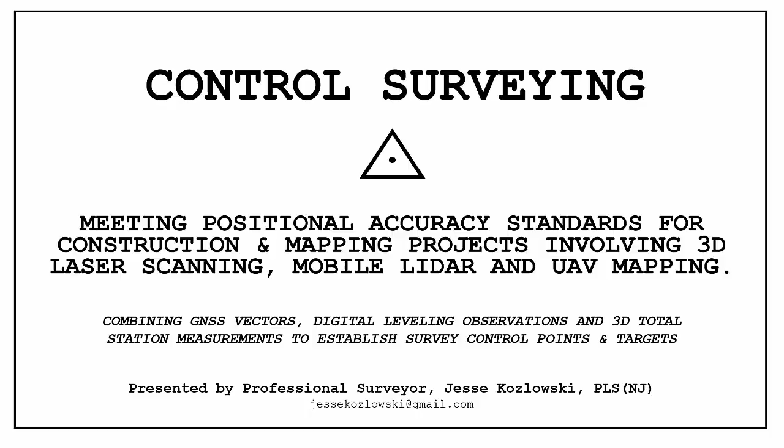This is just a preview of the presentation. I'll go into greater detail later in the presentation as to what all this is, and this is the one that I hope really captures your interest right now, to stick with me.

Mistaking precision for accuracy will hurt you, and that is going to be the primary topic covered here.

A little bit about me. Again, my name is Jesse Kozlowski. I've been surveying for about 40 years now. Here's just a little bit about my bio, and most of my career has been spent doing control work for all sorts of projects, large and small, and so that's kind of my specialty, and that's what I'll be talking about in this presentation.

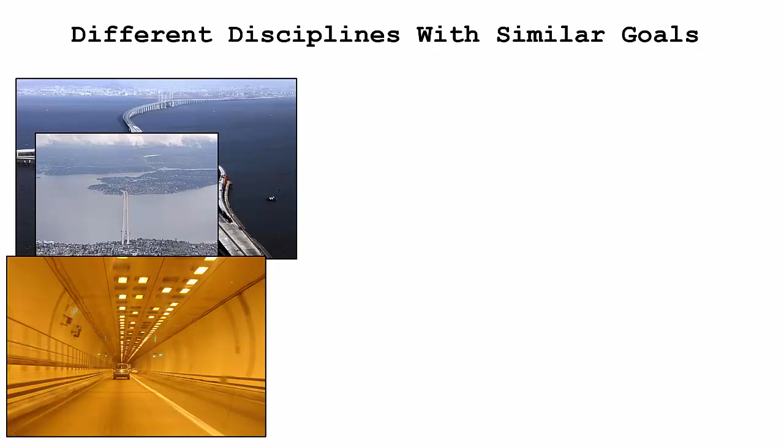So what I'll cover today is really applicable to lots of disciplines, whether it's highway involving bridges and tunnels, or railway transportation, again lots of tunnels and bridges, energy transmission and generation in power plants and utility lines, and pipelines for gas and oil, and of course building infrastructure. Everybody involved in these various disciplines all relies on survey control to get their projects completed.

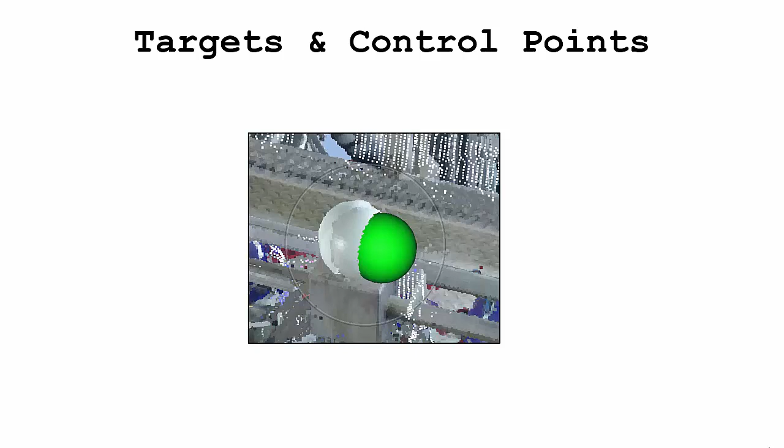All right, let's take a quick look at targets and control points. They're going to be different depending upon the application. You may have seen these types of spherical targets on your projects for 3D laser scanning, or for mapping projects you may have seen these black and white checker patterns with a number, sometimes painted in the roadways for aerial photography or UAV mapping. And then this type of chevron target is used in mobile mapping applications quite a bit. It could even be something as simple as a checkerboard pattern printed on paper, taped up on the wall.

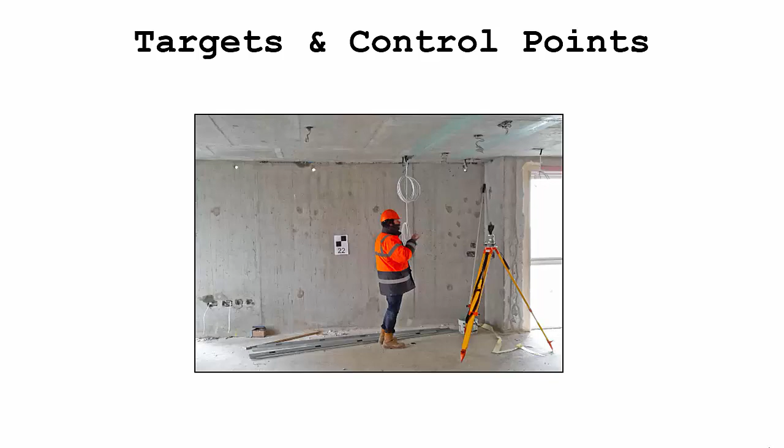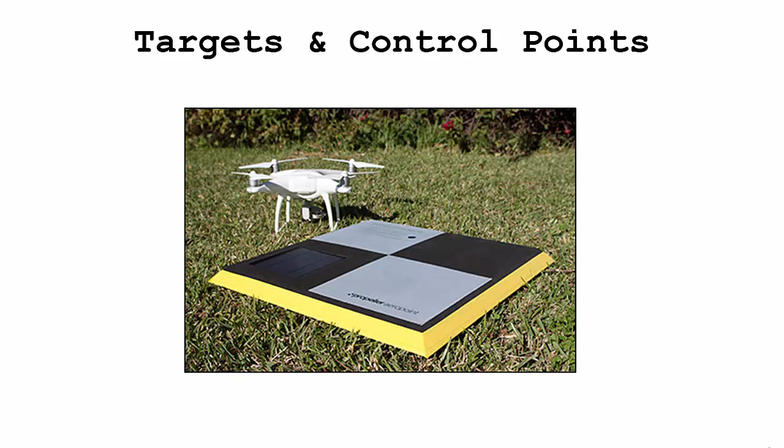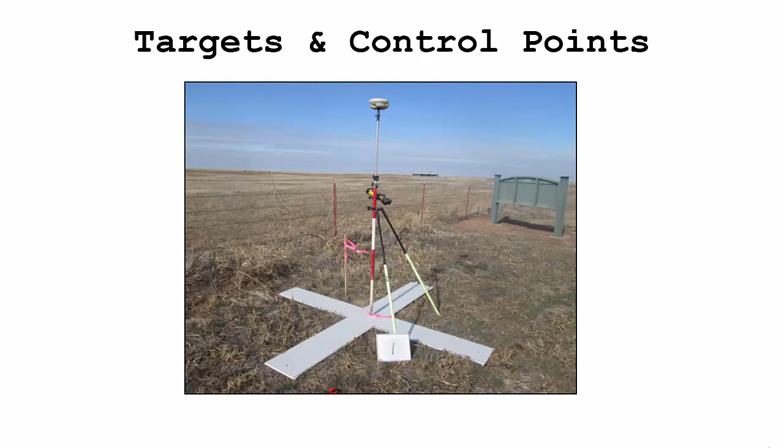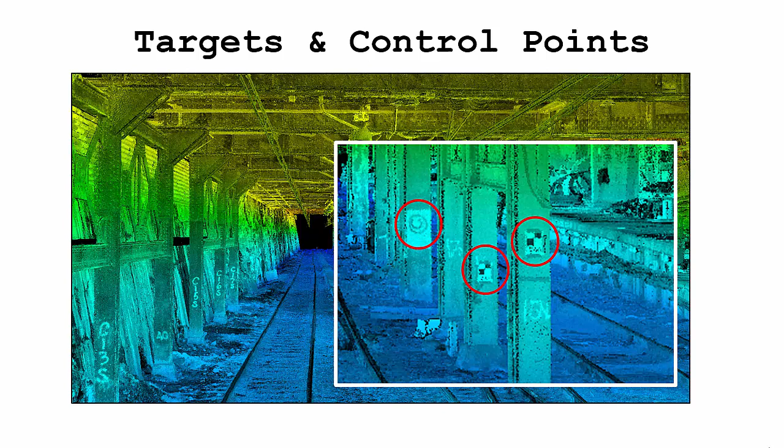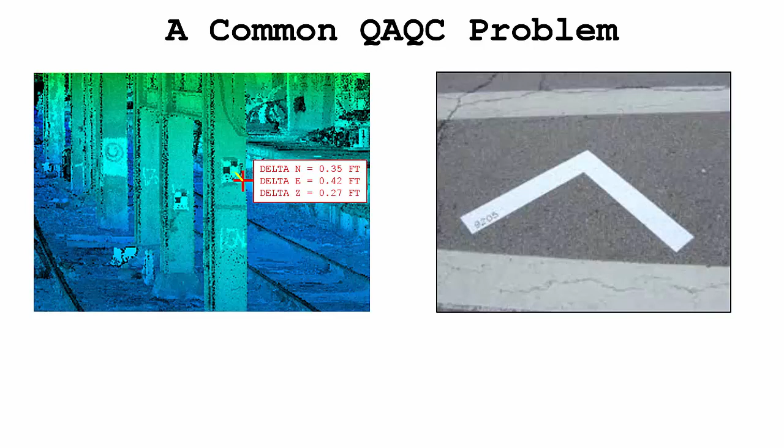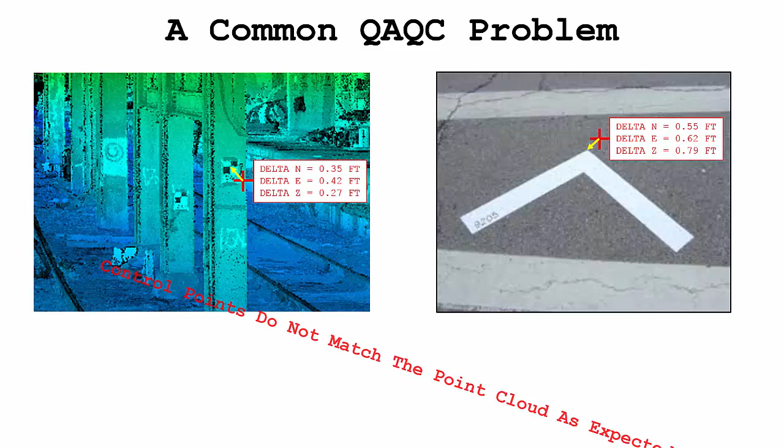Okay, in the next slide I'm going to introduce a common QAQC problem. Let's take a look. We have some point cloud data here, and we're comparing our coordinates for that target, and we see deltas, that is differences. Over here on the chevron we have some mapping digital photography, the coordinate of the chevron is different than the control value. And the amounts of these differences are larger than expected, or possibly just entirely unacceptable. So in a nutshell, what we're saying is that the control points do not match the point cloud as expected. So what is the expectation?

Well, it has to be as accurate as possible. You may have heard people talk like this: it has to be perfect, and there's no room for error. Or they'll say it has to be within an eighth inch. The contract specifies sixteenth inch tolerances, or thirty-second inch accuracy, or it has to be second order. Alright, so here we have various expectations.

Let's talk about these a little bit. In my mind, these are just imaginary, because there's actually no such thing as perfect values, and I hope to get that across through this presentation. These other ones, while they are at least better than the first three, there is still the need to verify that you've obtained these specifications. And when you haven't, the situation becomes one where people are pointing fingers at each other. How do you go about verifying that you've met these specifications? So I'm saying that these are all ambiguous, and that this is where the problem actually starts. And as far as second order, who even knows what that means anymore? So I want to take a look at that.

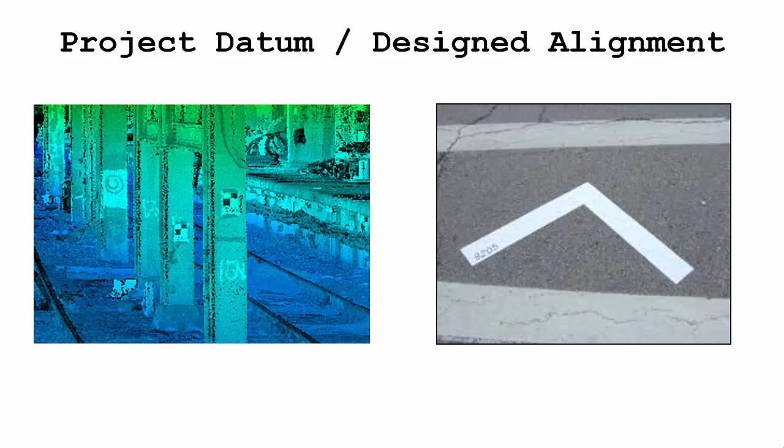You're probably already aware that technology is advancing to the point where each setup of the scanner is being registered in real time in the field. So your point clouds are registering together, but that's different than registering those clouds to the datum. That's something else, and that's what we're talking about in this presentation. We're talking about the project datum and the designed alignment, so that the cloud and imagery matches the control points on that project.

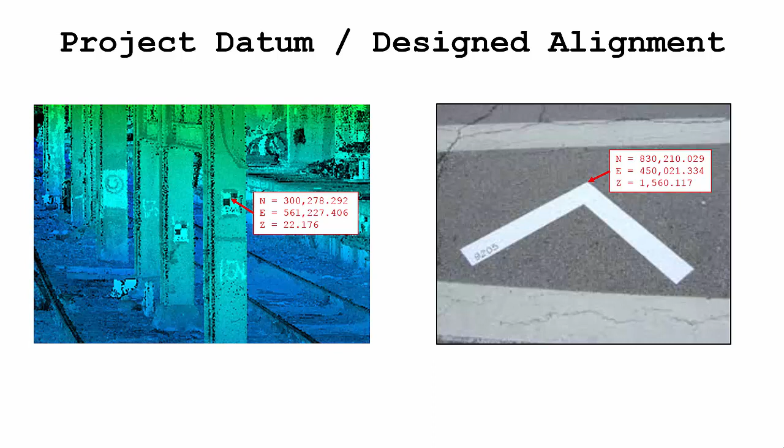So with that distinction made between registering point clouds together and aligning those clouds to the project datum, let's get back to the QAQC problem I'm presenting here, where again the control points and point cloud do not match. We're going to continue with this idea.

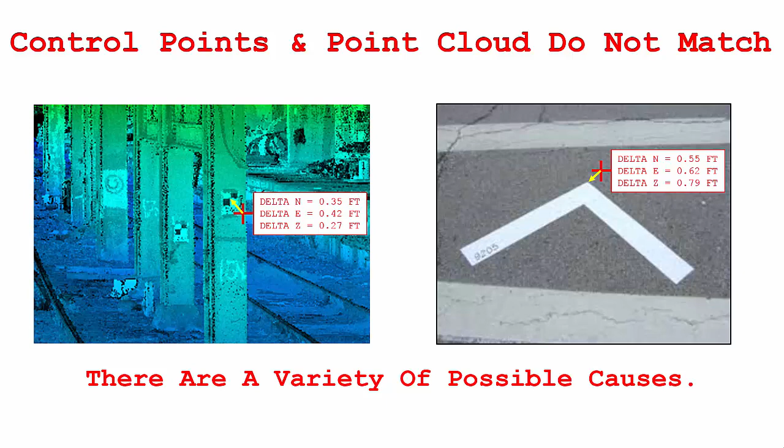There are a variety of possible causes to this. You could probably start thinking of some in your own experience, but no matter what the cause is, things come to a screeching halt. Like I said, there's finger pointing. This has to be resolved before you can continue.

There's an easy solution to the most common cause, and that's what I'm going to focus on through the rest of the presentation. By the way, what I'm going to show you has to happen no matter what anyway. You have to begin with it before you can even start to explore any other causes. Most often, what I'm going to show you eliminates the problem immediately. I'm just trying to keep your interest—stick with me, I can't tell you the whole thing in the first two slides. So here we go.

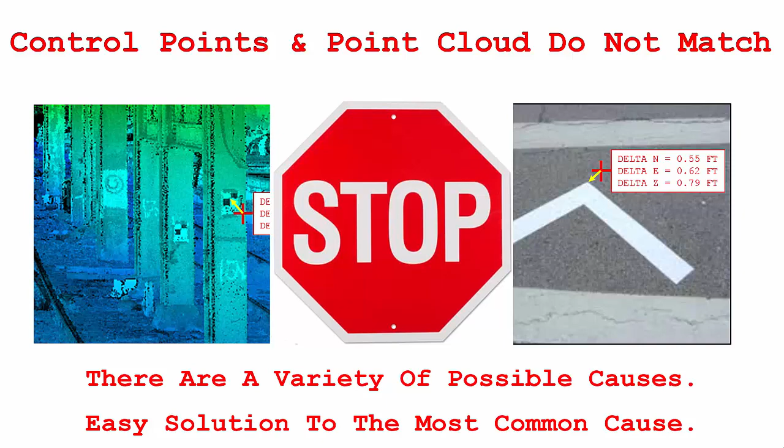Back to this examination of the expectations—I told you we're going to look at second order, and this will give us a history of where things were in the past and how we get to where we are today. Even though technology is changing rapidly, a lot of things remain the same. The common basics still apply, so let's keep that in mind.

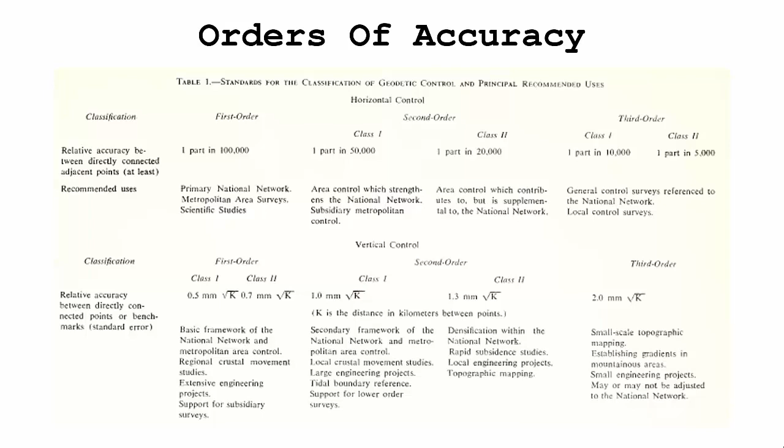Back to our very brief history lesson, taking a look at what second order is and where that came from—I'm saying it's old school. You can look at this document from 1974, and as you look in here you'll see orders of accuracy: first order, second order, and third order, and the classes below those. Lots of people think of just closure only—oh, they've met first order because they closed in greater than 1 part in 100,000.

There's more to it than that—it's actually a prescriptive standard, not just the closure that you meet. It's specifying the types of equipment to be used, the number of repetitions to be observed. So it tells you how to do the work in order to meet that order of accuracy.

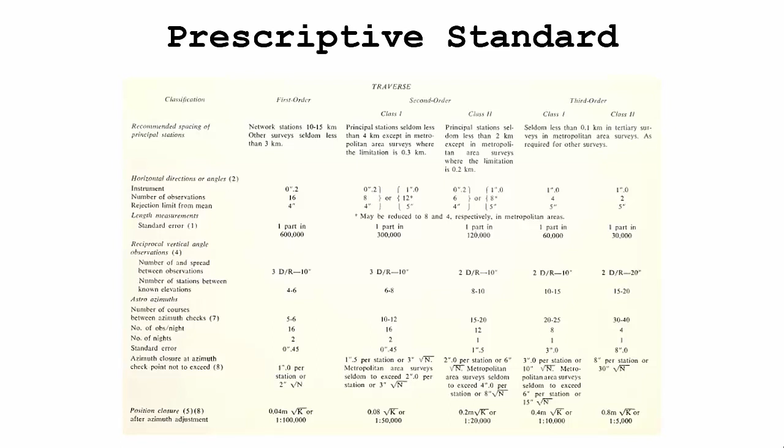All right, with that little bit of history out of the way, we're going to jump into the bulk of this presentation involving positional accuracy standards—not closure, relative closure standards. Let's take a look. If you look at page 2-3 of this publication by the FGDC, published in 1998, it's really becoming—a lot of state DOTs are starting to incorporate this standard now too, with the recognition that we're not doing things the same way all the time anymore. This standard is actually preferable for doing control work, especially in this modern era of 3D laser scanning and so much digital imagery.

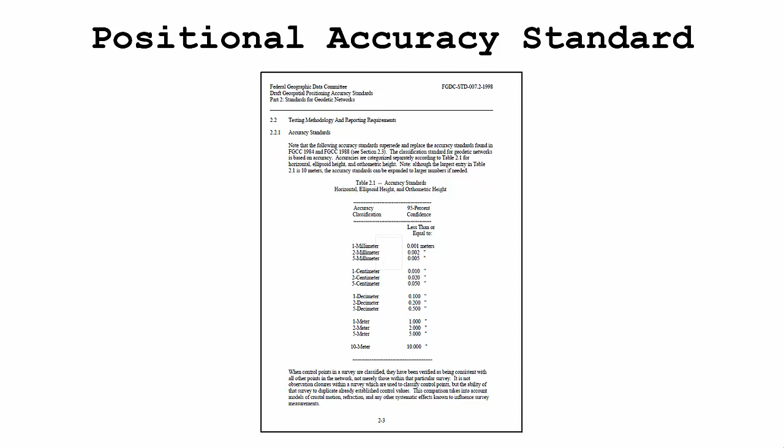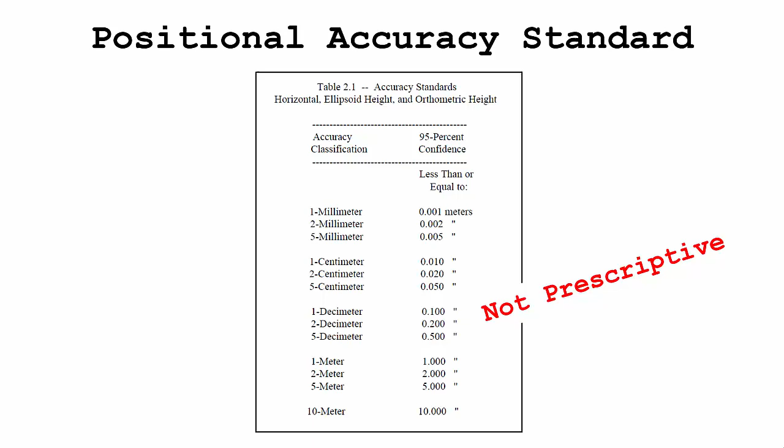Let's zoom in on that a little bit. And that's it. This is not a prescriptive standard. You won't find anything in this book telling you that you have to make your measurements this way or that way, or that you have to use this type of piece of equipment. It's not that way anymore.

About the only thing prescribed is how to handle the data, the fact that it must be analyzed, and there are certain things you have to do, which I'm not going to cover right here, but that's about the only prescription you could say is there. This is a more flexible way of doing our survey control work, and it accommodates a lot of the technology we have at our disposal now.

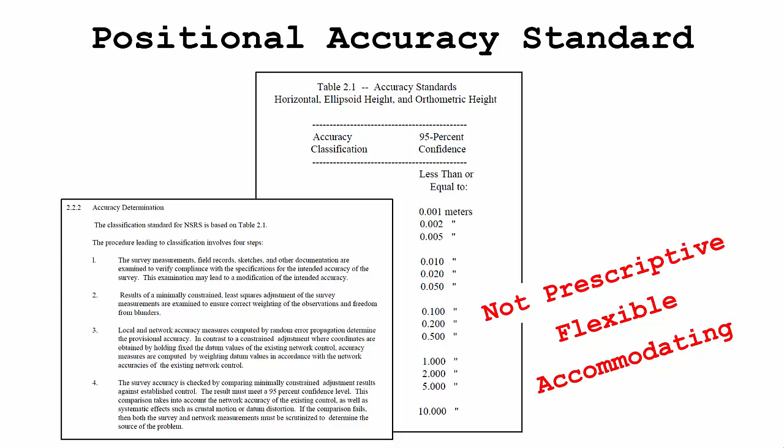So I've been seeing some discussions on LinkedIn about where we are today with trying to get people involved in surveying. Some people complain we have a lot of button pushers, which I really feel is unfair, because anybody that's involved in surveying now, that is just getting involved now, does not have the luxury or afford the time that we've had coming up through the profession as a rodman, then an instrument man, then a party chief. Those days are gone. We had a longer time to learn the profession. So it's up to us to help and mentor those who are coming in now and try to catch them up a little bit.

This is a great book, and I'd recommend it to anybody that is interested in survey control and the measurements involved in land surveying, by Ben Buckner, Surveying Measurements and Their Analysis. I'm just going to pull one thing up here from chapter 9, the surveyor as expert measurer.

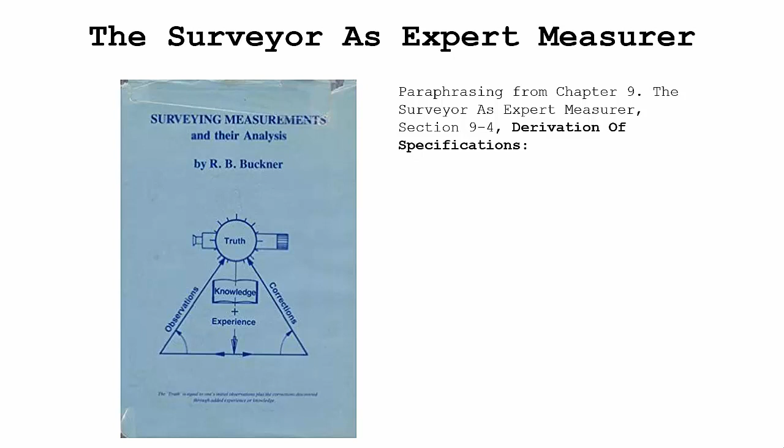He says here, many surveyors will arbitrarily select equipment and methods, then merely hope that the tolerance is achieved, blindly relying on the precision of the equipment. These surveyors will certify to the accuracy, rationalizing that they had done their best.

So the fact is, the equipment we have available today is incredible. If we can just manage to get it set up over the right point, you're going to end up with incredibly precise measurements.

All right, so we have to go beyond that, though. We have to actually handle the data and analyze the data. We have to assure that the results are where they need to be, that we've actually achieved the goal for the project. So again here, instead, the professional approach includes a thorough design of the measurement specifications to achieve the required accuracy for the project application.

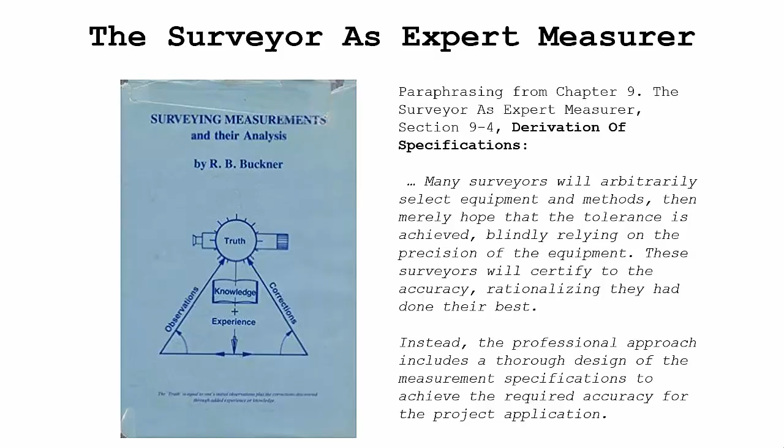So what I'm going to go into now is a presentation of some data, discussing this whole accuracy versus precision thing. You've seen this topic covered so many times, I'll just show you my take on it. I'm going to be using a real-time network VRS example, but it could easily also apply to an RTK base station and rover. So we have here a Trimble R10 set up over a point out in front of the office.

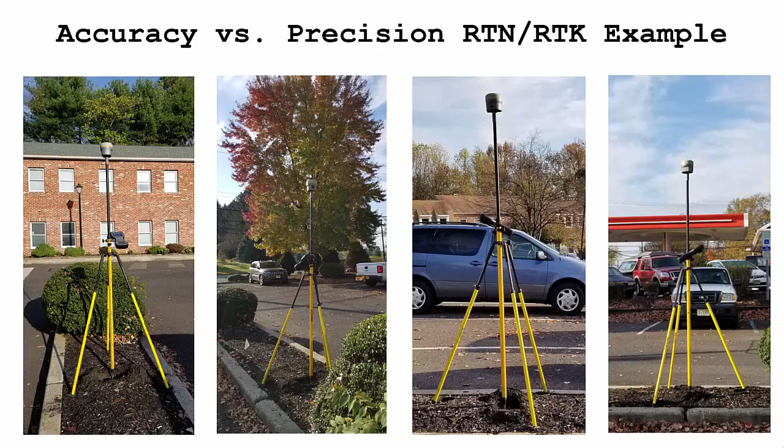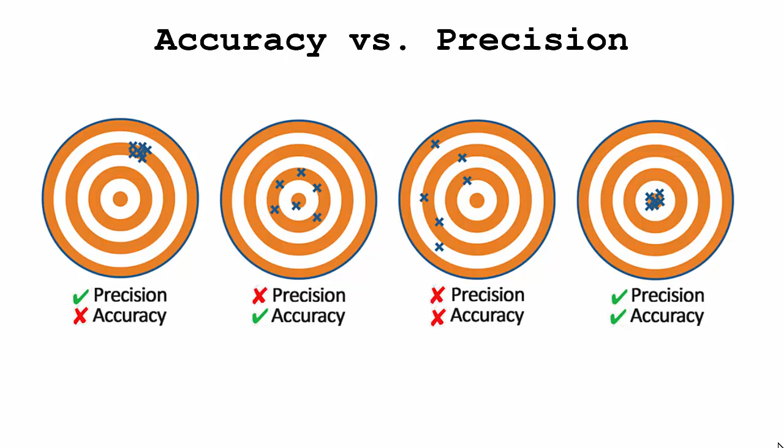We want to take that equipment, operate it properly, and use the appropriate care to assure that we end up with accurate results. The one on the far left is the example of using this incredible equipment and possibly not taking the care needed, or making blunders that should have been detected, so you have high precision measurements, but they're nowhere near achieving the accuracy needed. So boom, I'm just going to leave that there. Distinction between accuracy versus precision.

So the data that I'm going to be showing you - it's just collecting some VRS data in the morning. I got nearly 3 hours, actually 2 hours 50 minutes of data, and I had the equipment set up to log a position every 30 seconds. So we ended up with 342 observations. Then in the afternoon, I got just over 2 hours, about 2 hours and 16 minutes of data, and that ended up giving us about 250 observations, again at a 30-second epoch. All totaled, between the morning and the afternoon, we have 6 hours and 41 minutes of data.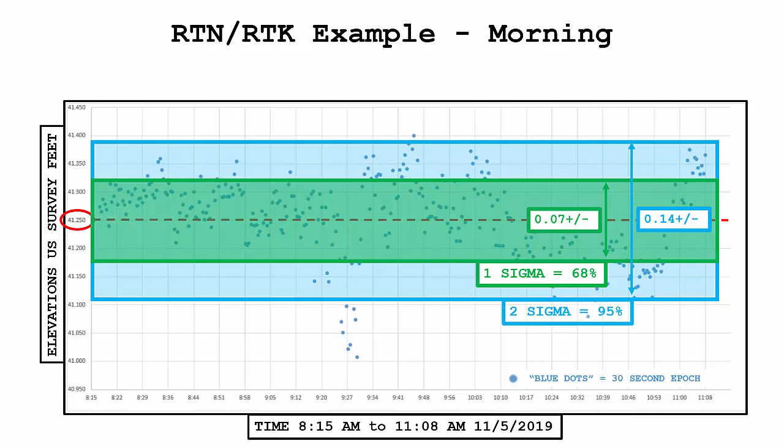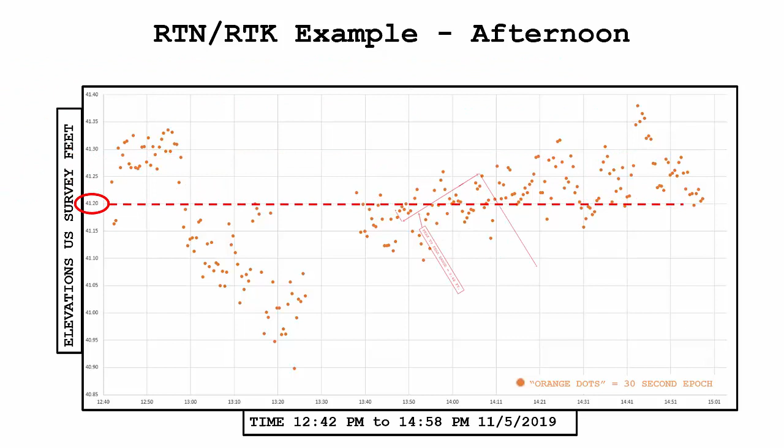Now let's look at the afternoon. There's our average, 41.20. There's our peak-to-peak range of almost 5/10 in this case. These orange dots are again 30-second epoch recordings.

And again, looking at the standard deviation, in this data set it turned out to be plus or minus 9/100ths, which is 1 sigma. And bumping that up for a higher confidence...

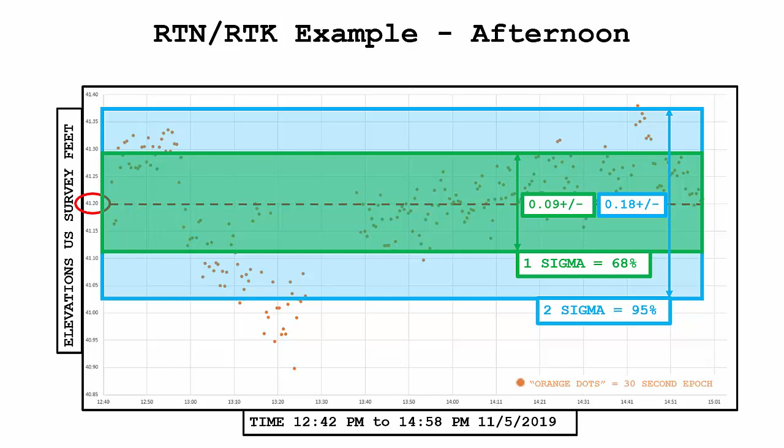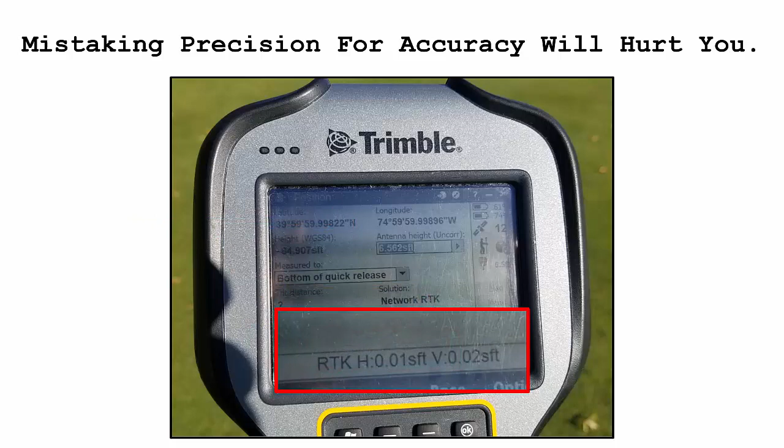So when you look at that, I hope you now get what I'm saying here, that mistaking precision for accuracy will hurt you. When you look at your data collector, let's zoom in there, and you see 100th by 200ths, horizontal and vertical.

And you think that what you're doing right there is accurate to those numbers. You're mistaken. Basically these values are the precision of the system performing at that moment. You're seeing that type of repeatability at that moment, and they're being reported to you at 1 sigma, which is 68% confidence. I'm showing you a Trimble data collector here.

This would apply to any manufacturer. They're not doing anything different. This is how RTK works.

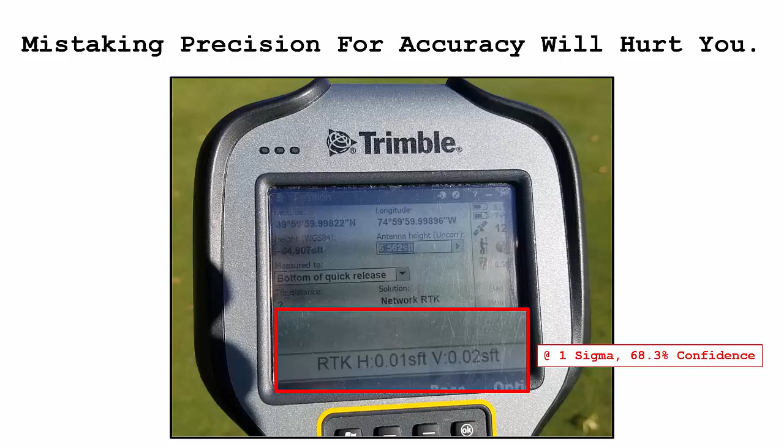Just before we move on, a reminder again of the difference between accuracy versus precision. So the data we just looked at, we were just set up on a random point. We really couldn't say anything about the accuracy. We were just able to examine the performance of the system by setting it up on a random point and then doing some statistical analysis on the data collected.

And we find that the system performs exactly as stated in the manufacturer's brochure. If you flip over the brochures of any of the manufacturers, they're going to tell you how the system performs and what its precision is, or its RMS, and they're usually reported at 1 sigma.

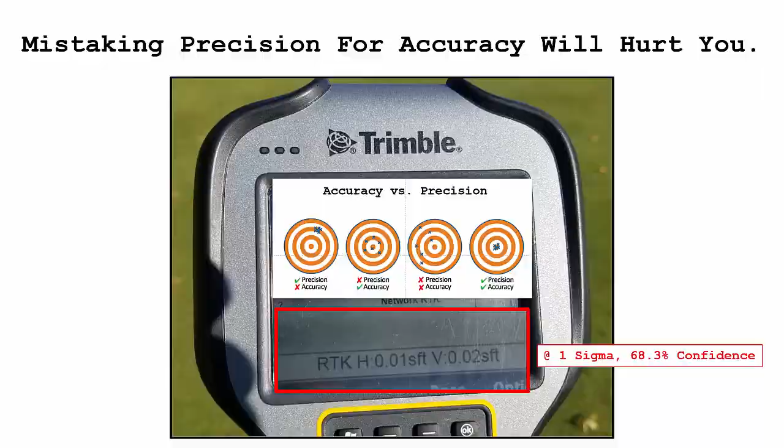Next, we're going to look at doing the same type of test and having a point to compare to. So in this case it's station HAINESPORT, which is a deep rod mark. There it is. It's a deep rod mark set to refusal, and was published in 2006.

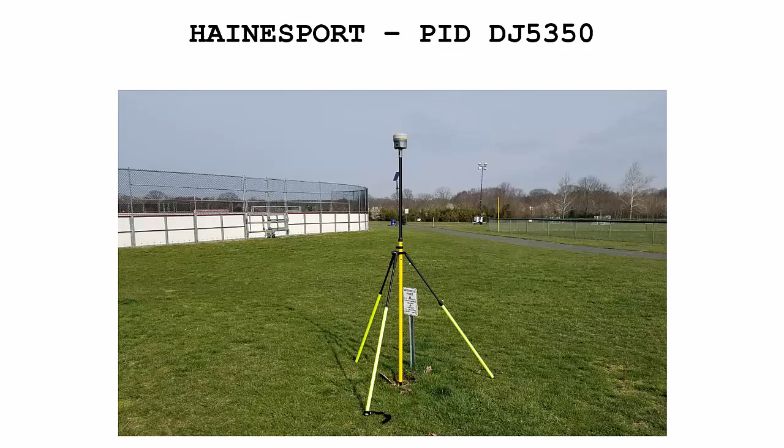And here is the Trimble R10 receiver set up over that mark. And here's the data sheet for the mark, and some field notes just indicating the date of the collection. Again, 30-second continuous topo, and also recording the raw data,

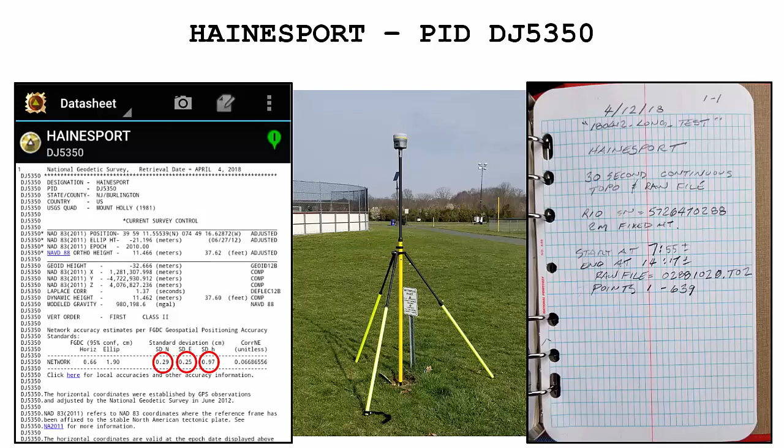and the start and stop time. So over here on the data sheet, you could see that they report the positional accuracy just the way it is described in the book, in the standard book, the FGDC book I showed you earlier.

So here's just a quick presentation of the data. This was not a morning and afternoon, it was just one long occupation, and it was about almost 5 hours and 20 minutes. So we ended up with 639 observations at a 30-second epoch, and I also sent that data to OPUS.

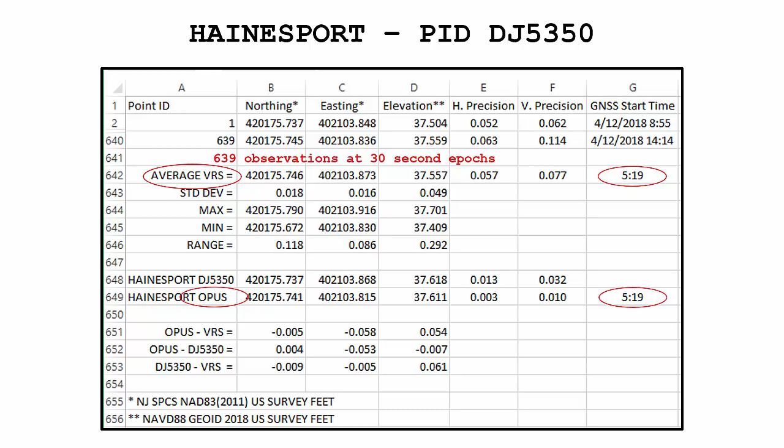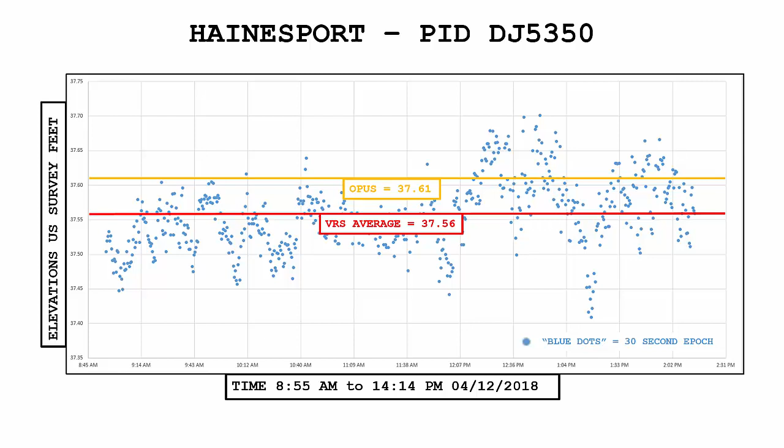The peak-to-peak range over the 5 hours and 19 minutes was almost 3/10. And again, what's the expectation? Read the data sheet, I mentioned this earlier. You can take the data sheet for any piece of equipment and look at what the manufacturer is telling you.

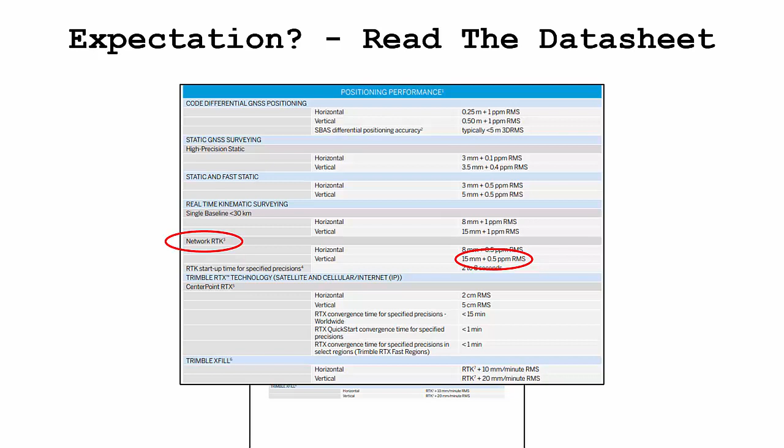You can expect in terms of performance. So in this case, this was a network RTK, and the expectation in the vertical is 15 millimeters plus 0.5 parts per million, and that's reported at an RMS, meaning that it's 68.3% of the time. Okay, so let's plot that.

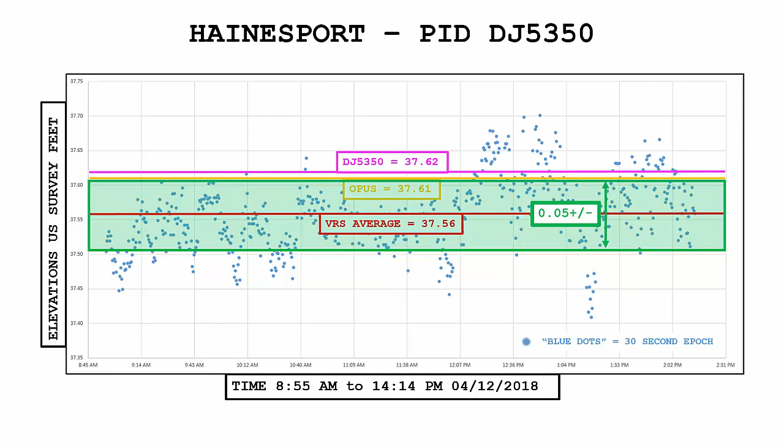Here we see the 1 sigma value is, in this case, plus or minus 5/100ths of a foot. So there's the 1 sigma, and at 2 sigma it's plus or minus 1/10 of a foot. 2 sigma.

Did we make it? If we take the 15 millimeters plus the 0.5 parts per million, we see that we should be performing at 1 sigma within about 5/100ths, and we see that we are. So the system is performing well within the tolerance specified.

Let's look at this data a little more. Here we have the peak-to-peak range in the elevations as almost 3/10 of a foot. Let's look at these 3 times — I almost said points, but these are not points. We're occupying one point called HAINESPORT. These are just 3 portions of time: A, B, and C. Keep in mind the data collector screen I showed you earlier, where you're looking at the precision, is 1/100th of a foot horizontal, 2/100ths of a foot vertical, and that's at 1 sigma.

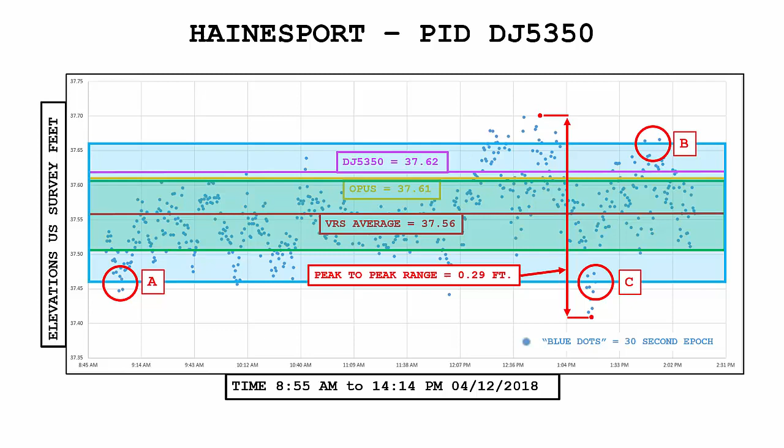Speaking of methods and procedures designed to achieve an accuracy specification, take a look at Mark Armstrong's presentation, dated 2013. Go look this up — it's an excellent resource going through this entire topic of precision versus accuracy using RTK. I'll leave that there for you to go find for yourself and take a look at. It's very valuable.

Okay, moving on. Now back to the main topic of this presentation: this common QAQC problem where the control points do not match the point cloud as expected. We're about half an hour into the presentation, I hope you've stayed this long. We're really going to get into some interesting stuff coming up. Stick with me, it'll be well worth your time.

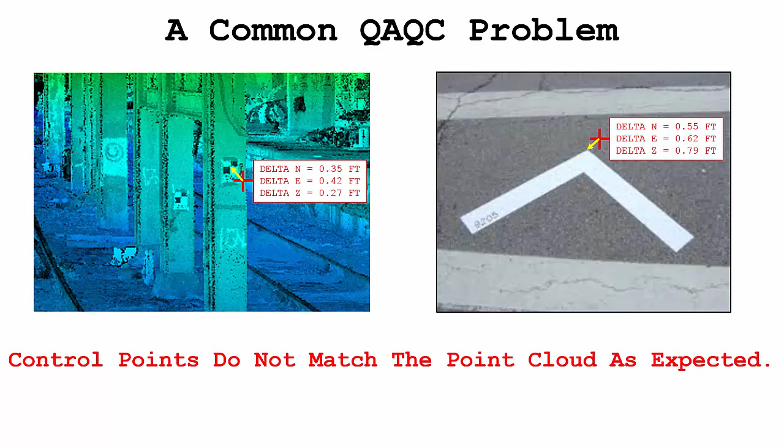Just to remind you, what we're seeing is a situation where the control values are not matching either the point clouds, the imagery, or in some cases actual construction elements on the project. So continuing, we're going to examine the problem now, first by looking at something very common: your typical text file that you'll receive or generate, a comma separated text file of ASCII information.

Insist on receiving the positional accuracy of the control points and the targets. So when you have that information as the last 3 columns, you are better equipped to make an evaluation or determination of how consistent this control is. Does it meet your expectation? Does it meet the accuracy goals for the project?

Have these points all been leveled through? Were they supposed to be leveled through? Does anything stick out that might indicate a problem? That type of evaluation can be made right away just by sorting the columns by largest value. You can see anything that might pop up.

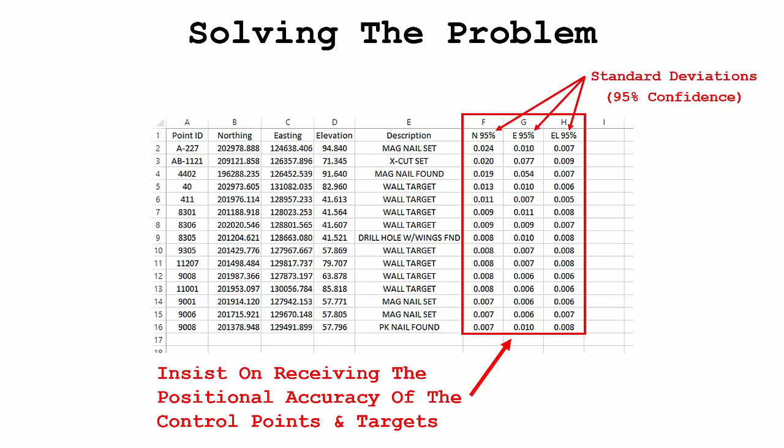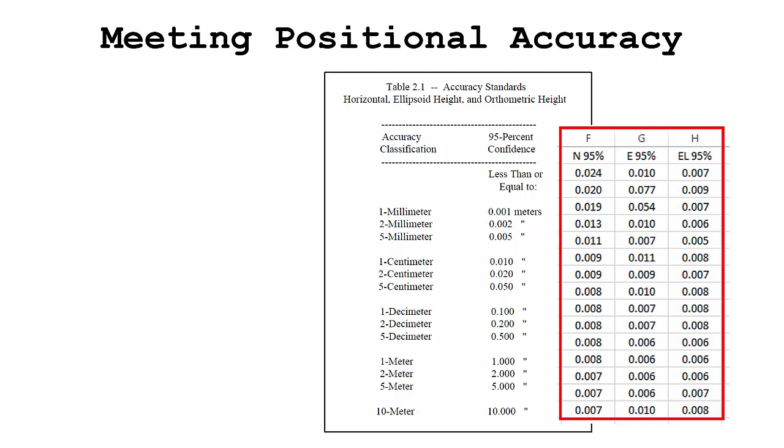Let's take a look at an example, bringing back into the discussion the book I had shown you earlier, the 1998 publication, which includes the table of positional accuracy values. Here's the last 3 columns from the sample data we're looking at. Let's just say the project specification called for a 2 centimeter accuracy.

I should also say that you can specify a certain horizontal accuracy and a certain vertical accuracy. They don't have to be the same, but just for a simple discussion here, we could see that some of these points stick out a little bit more than others.

That third point down, or actually the easting of the second point down, is almost 8. I'm not including units here - I'm not trying to goober this up with feet or meters. Just look at the values right now.

You're able to make a determination right away, the points that meet and the points that do not meet. And then you can make a decision about what is that point - is it just squeaking by slightly, or do we have a real problem here? Maybe we have to go reobserve that, or drop it from our solution.

All I'm saying is you're able to make a determination right now, instead of during the LIDAR processing, when that's the last place you want to be making these types of discoveries. This is part of the QAQC process. It should happen before the control values are given to anyone else to use for additional processing of LIDAR data or construction layout, etc.

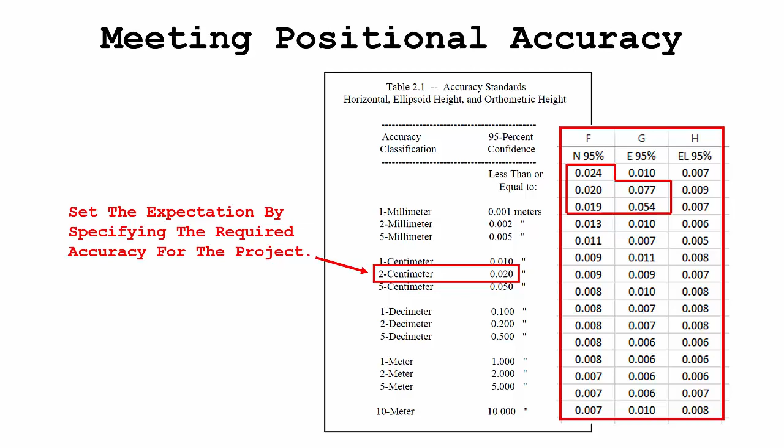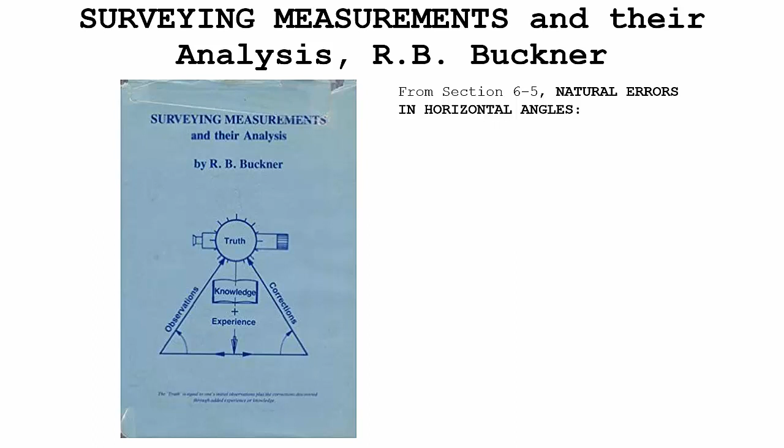Again, I just want to reintroduce another segment of Ben Buckner's book, Surveying Measurements and Their Analysis. I'm doing this because I want people to get back to some of the basics, things we don't think about anymore because we're just using electronic equipment - we buy it, put it out in the field, use it, and we're forgetting that equipment is still affected by things like this.

This matters. Horizontal refraction affects horizontal angles. The bending of a sight line can occur when the sight line passes very closely to large objects, such as buildings, especially if they are radiating heat. This can cause an erroneous pointing.

We have to get back to thinking about what we're doing. Let's say you're down in a tunnel making these observations, and there's some equipment running down there, maybe with heat exhaust coming across the line of sight. You could wrap that angle 8 times or 16 times - it doesn't matter. You're going to have an erroneous pointing.

So you have to still think about what you're doing, even though we have this magnificent equipment able to make incredible measurements and record them for us. We as surveyors are still involved in planning that project, executing it, and making sure everyone involved - the field staff, the surveyors on the job - are acquainted with all these principles and aspects.

So, propagation of random errors in horizontal angles. Estimation of expected closure and evaluation of uncertainty is an important part of surveying measurement theory and practice. Such ability elevates the surveyor from craftsman or technician toward professional status.

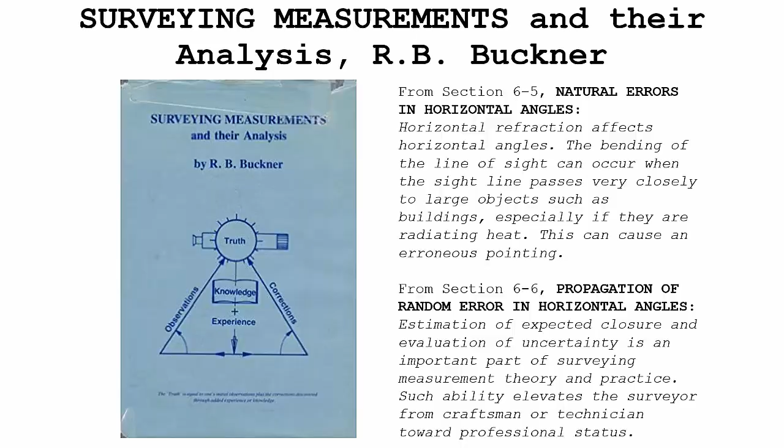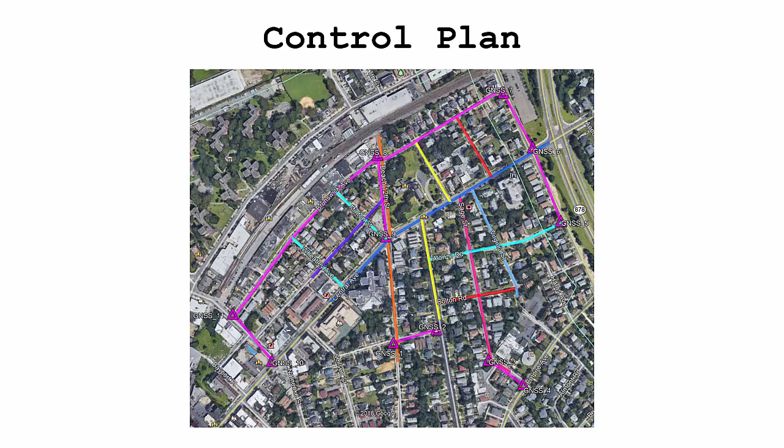So you want to develop a control plan. You want your people to know where they should be putting these points. Again, you're going to look at the site conditions and try to plan the best route. If you're going across a bridge, how are you going to cross it? Are you doing digital leveling or not? What does the project call for? That's going to indicate what equipment, methods, and procedures are needed. Just don't go out and shoot stuff, we've got to get away from that.

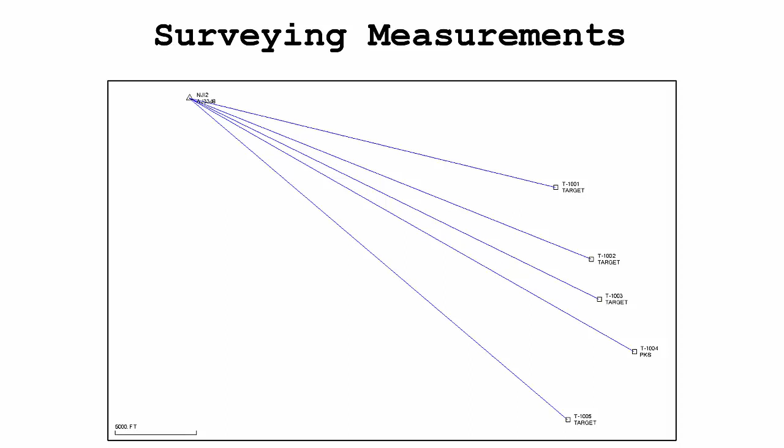So let's look at surveying measurements. I'm including this for anyone who may not be a surveyor but heard about this presentation and became interested in the topic. In a nutshell, we've got surveying measurements like radial RTK or RTN vectors, and generally a lot of aerial control is being located using that method, and it's probably fine for that.

Keep in mind, I showed you earlier the type of deviation or difference you can see in the elevations. You've got to look at your project specification to make sure the level of mapping you're doing can absorb that. If it can't, you've got to think about other ways of tightening that up.

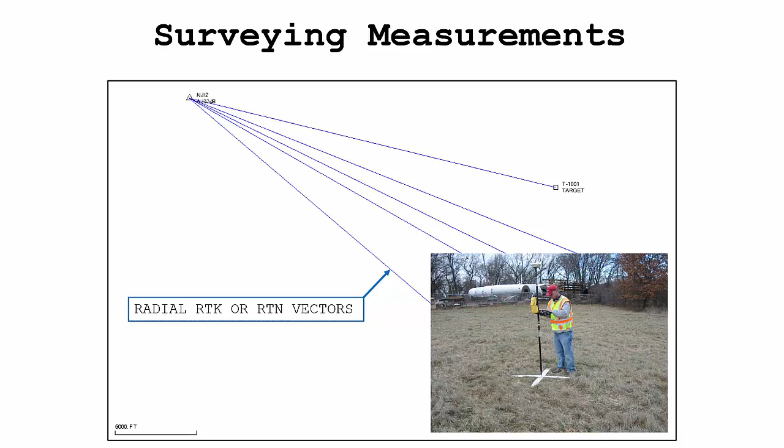Some projects can't tolerate 2/10 of a difference in elevations between points, so you may be using some RTN vectors or post-processed vectors from CORS, and then also some vectors between points on the project site. So here would be a simple little network of GNSS vectors tying the site and tying points together.

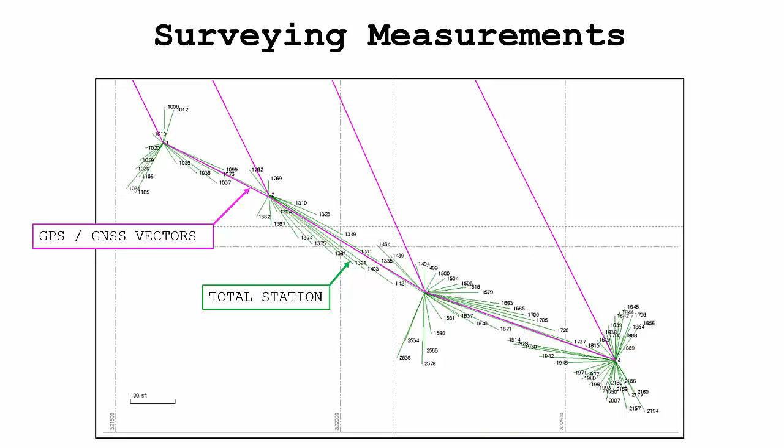And now we're using a total station to supplement and put in additional control or surveying targets on the project. Some projects require very, very tight vertical accuracy, and in that case you're going to break out that digital level and run through a lot of the points, if not all of them. Depends on the job.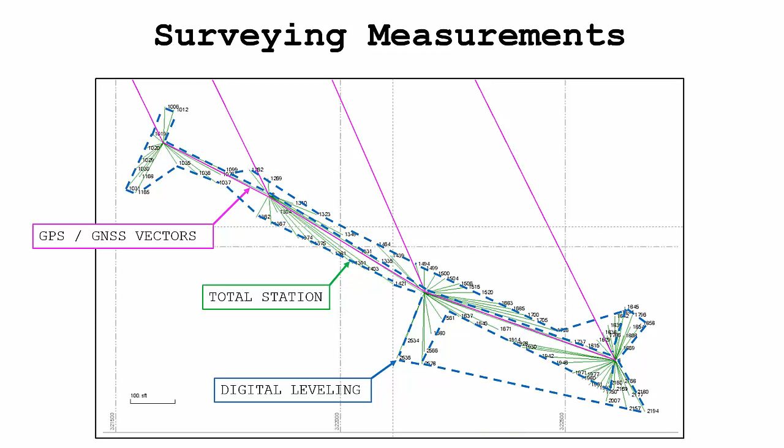So where do these last 3 columns come from? How do we get these columns? We're not talking about exporting out the precision from the data collector. You can do that, and by now in this presentation I hope you recognize that's not what we're talking about in these last 3 columns. The precision of the measurements is not an indication of the accuracy. I can't say it too many times.

The last three columns indicating the positional tolerance of the points come from surveying analysis software—dare I say it, least squares adjustment software. Has anyone used some of the NGS software available? Everyone's familiar with StarNet, and there's Columbus, and I've used both. And dating myself, I go back to TrimNet Plus days. I love that software.

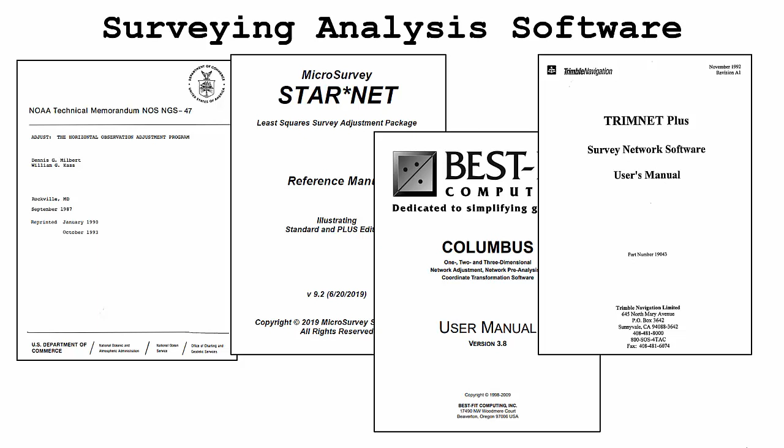It's great software. Anyway, I'm just getting nostalgic there. Of course, using Trimble Business Center now, and Carlson has SurvNET, which I've used and works very well. And I love Move3 as well. Other manufacturers produce their own least squares analysis software.

So the positional accuracy comes from the least squares adjustment, and that's how we can determine that all of these control points are related to each other. None of them have just been keyed in. They weren't keyed in from Google Earth. They are all consistent, and you're going to know right away.

Did you level through all of them or not? Do you have duplicate point numbers that are next to each other and are really supposed to be the same point? Did you by chance grab the wrong value, the point that wasn't leveled through? There are so many blunders that can occur, but if we take the time and care in the field to collect the data correctly, bring it in, eliminate those blunders, and perform a least squares adjustment, you're going to end up with very, very reliable control.

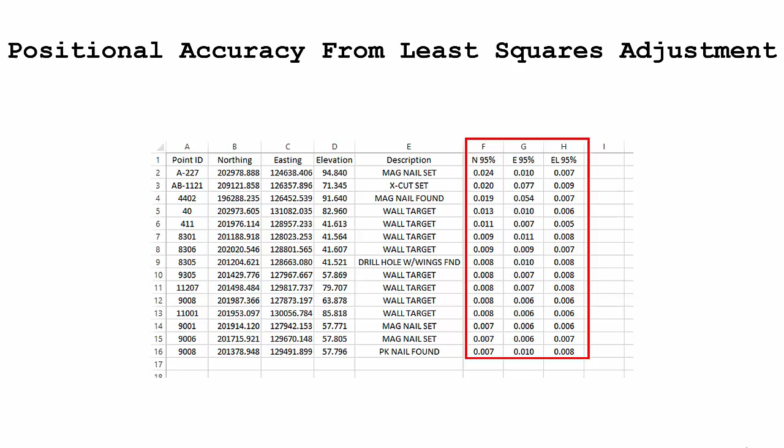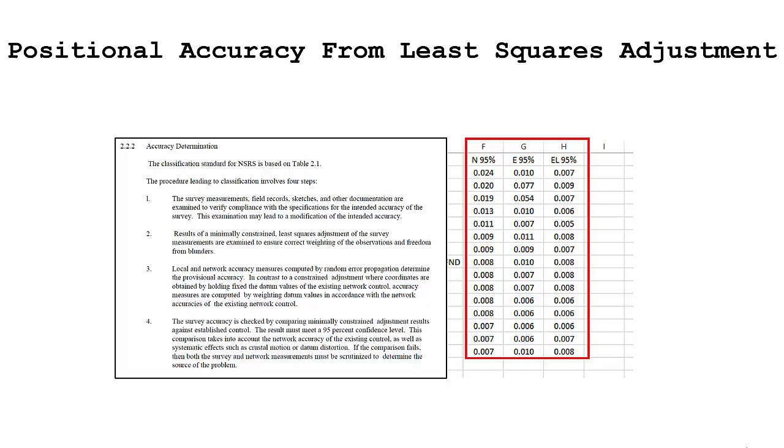Basically, this page is indicating that you're going to do a minimally constrained adjustment, and then a fully constrained adjustment, which really matters if you're doing control on site—in a plant or factory setting—where your new survey work has to match into legacy control. This is the only way you're going to be able to make that happen in a way that provides consistent results.

So no adjustment, no positional accuracy.

Therefore, the control values are really in question. We're getting close to the end of the presentation, and I'm glad you stuck with me this far, because this is where I'm going to really make the point.

Unfortunately, this happens a lot. These types of text files are even sometimes just exported right out of the data collector without any analysis and given to someone else to make use of. Then they struggle with it, wondering why they're missing this by a couple of tenths, or if it's under a tenth, they just say that's how it is and move on. That's unfortunate, because if you take the time, you can produce results that are fantastic.

When you give results to someone else, it's all going to match, everyone's happy, and the project moves on. There's no pointing fingers, no questions about whether the LIDAR is bad or the control is bad. Let's do that QAQC up front before we get to a problem like that, so don't jeopardize the project.

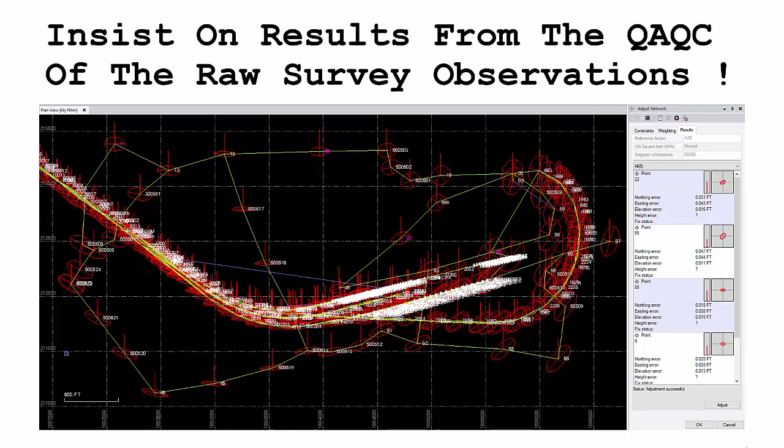Insist on results from the QAQC of the raw survey observations. That's what you want to see, that everything on the site is consistent. If you want to guarantee a problem, export that file right out of the data collector. You've already seen what happens - everything looks great, and no matter what time of day, you're going to be seeing hundredths by two-hundredths, and that's precision, not accuracy.

So on that site, if you surveyed it all day long, you'd be real happy if the elevations were within 2 or 3 tenths, and that's for sure. And you know what I'm talking about - you've seen this.

You put in a couple of RTK points or VRS points on one side of the project, and later in the day you put some elsewhere on the project. If you traverse between those, you're going to see exactly what I'm pointing out here - a couple of tenths difference in elevation. It doesn't have to be that way.

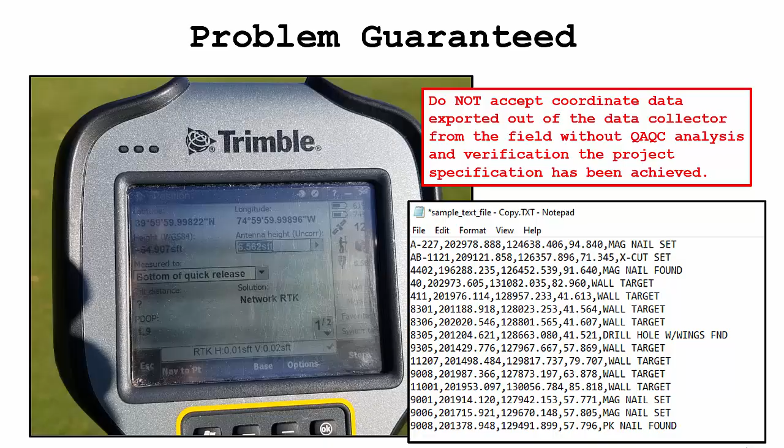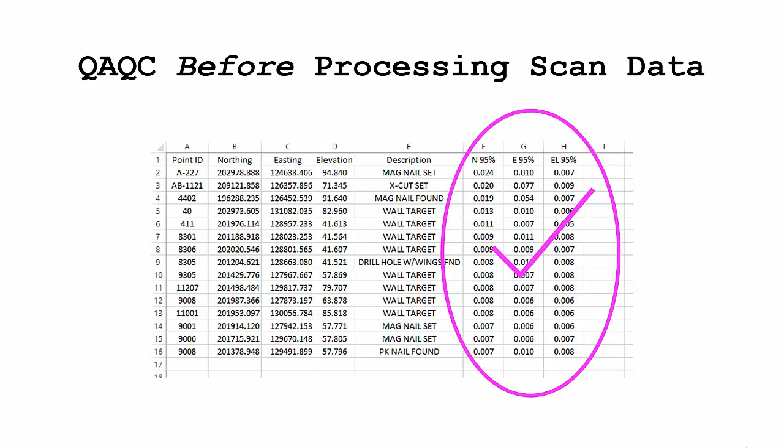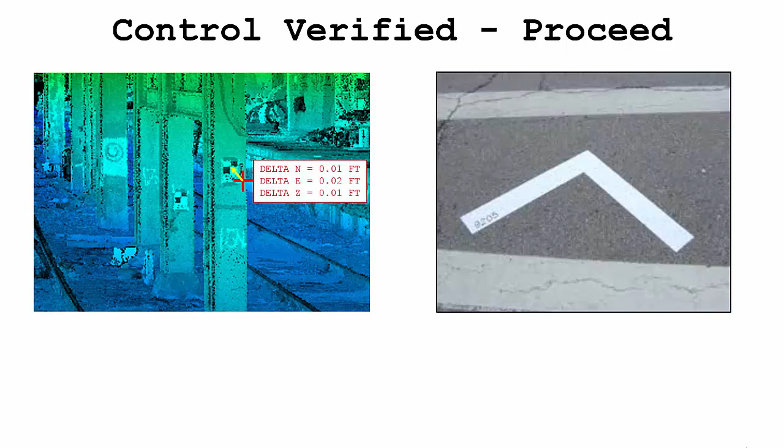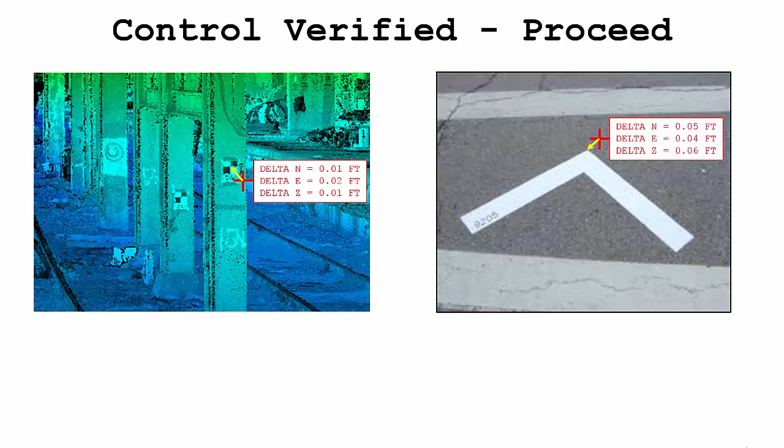So do the QAQC before processing the scan data, or whatever is being done on this project. Once you do this QAQC step and make that check, you have reliable control values, and with the control verified, proceed. Everyone's happy - now you're looking at deltas at levels that are expected and tolerable, that is allowable. You've met the project specification, and with the control points and point cloud agreeing within the project specifications, everyone's happy.

I'll also mention, if you recall way at the beginning of the presentation, I said there were various possible causes for the problem. Now that this step has been completed and you have consistent, reliable control, if there are still deltas or differences, you're now in a position to proceed to the next steps needed to find out what the issue is.

I'm not going to cover that here, but what I'm leaving you with is the idea that you can't even explore any other reasons for this problem until you've at least determined that the control is good at some level of certainty and that you've met the project specification. Once you've done that, you've got a job to do to go find out what else possibly happened. But I think that's much more rare than the problem we've just gone through in this whole presentation - control that is at best within a few tenths.